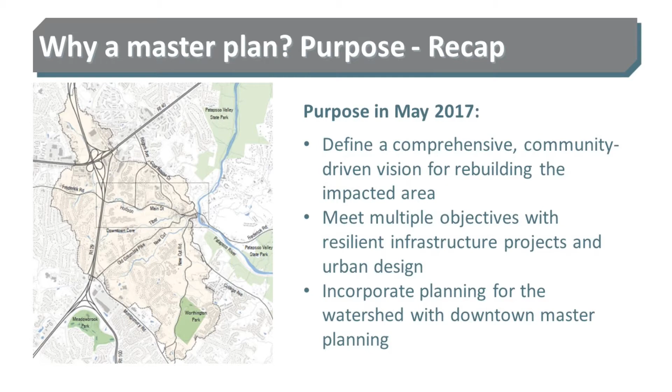In May 2017, the county hired Mahan Rykiel and their team to help us prepare a master plan. We also formed an 11-member Citizens Planning Advisory team that included residents, business and property owners, and community leaders. They've been a great help to the county and a great sounding board as the plan has been developing. They've also done an outstanding job reaching out and promoting this effort with their neighbors, community groups, and social networks.

We look forward to their continued input when we have yet another meeting in October of this year. To date, we've had a total of 9 public master plan meetings.

That includes 5 community meetings and 4 public master plan advisory team meetings. Our consultants also held a pop-up event in 2016 on Main Street as part of the Music Fest, plus dozens and dozens of individual meetings with stakeholders, property owners, and others. Tonight's meeting marks the 10th public master plan meeting, and we'll be back, as I mentioned, in October.

This meeting is the formal restart of the master plan process for Ellicott City, which stalled after the May 27, 2018 flood. This spring, the county had been working with our consultant team on a draft plan, and it was on the verge of being released to the public for comment and input, and then came May 27th.

While the purpose of this master plan remains as relevant as ever, our consultants are in the process of developing and testing new concepts guided by today's realities. Those will be presented and discussed in detail to you in October, which will also include a detailed discussion of the county's 5-year flood mitigation plan.

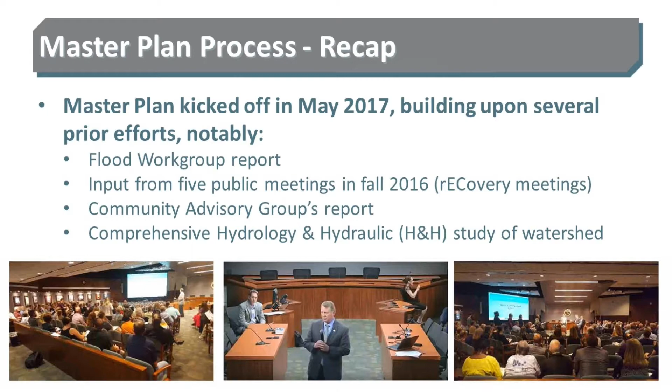We can't stress enough the importance of that H&H study in our work and the model it created out of that study. It's really served as a baseline for our master plan.

For those of you involved in the meetings, you've seen a number of scenarios we presented. We've had a great relationship with McCormick Taylor, working back and forth, testing ideas, and running models to see what works effectively and what doesn't.

It's important to note that out of the H&H study, there were a number of projects identified that Chris will highlight again in his presentation. But we had to use the master plan process to really examine those, to determine which would be most effective in achieving multiple goals for the plan.

Some of the considerations we took into account were constructability, cost, the complexity of not only permitting and constructing, and also the time involved in implementing those.

A number of the recommendations, or potential projects identified in the H&H study, really had a limited ability to achieve multiple objectives. While they achieved some flood mitigation objectives, they wouldn't necessarily accommodate some of the other objectives of the master plan. So that was really the focus of some of our work as we worked with the H&H study and the master plan.

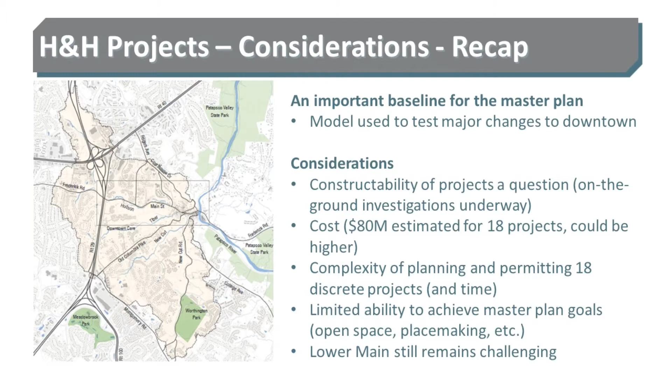So the process, as Val said, I'm not going to go over the detail of the number of meetings we've had. We've had a number of meetings. It was a 4-part process.

We were at the light blue phase, the draft stage. We had shared in March a number of scenarios, and we were in the process of refining those scenarios so we could put them into the draft plan and present them for public review. And that's when the May storm hit.

But in that process, where we left off in March, we had identified a vision and also a number of objectives that are still relevant today. The vision, as a recap, is Ellicott City and its watershed as a model resilient community that thrives by protecting its people, commerce, history, culture, and natural environment. And this is still relevant today.

This vision is informed by 4 master plan objectives that were really developed as the 4 pillars out of the CAG process prior to the beginning of the master plan process. They include rebuilding, environmental, preservation, and economy. So our intent has been to seek flood mitigation strategies that could advance all 4 of these objectives.

The study area, as I indicated earlier, is the entire watershed. As we began looking at background information and studies that had been done, we quickly learned that much of the watershed was built out with limited physical space to make significant changes. Much of the development in the watershed took place before current stormwater management regulations were in place.

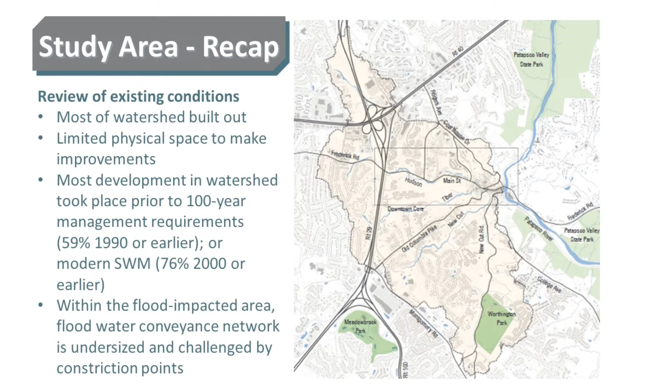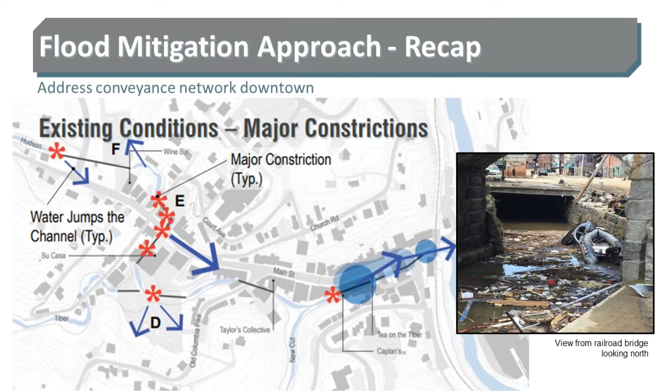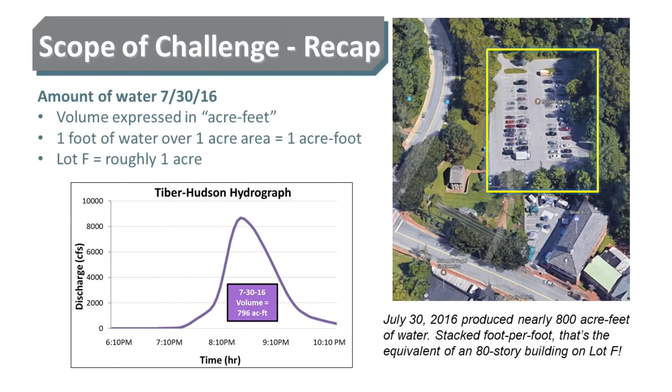In fact, McCormick Taylor helped illustrate this in their H&H study and their presentation to give an idea of the amount of water that needs to be conveyed. Lot F is about a 1 acre footprint, and with 800 acre feet of volume of water during the 2016 event, that would be equivalent of an 80-story building over that 1 acre footprint. So that gives an idea of the volume of water that needs to be conveyed.

For Lower Main and the West End, our biggest challenge, there weren't many opportunities to expand the channel, and our focus there has been on emphasizing flood-proofing.

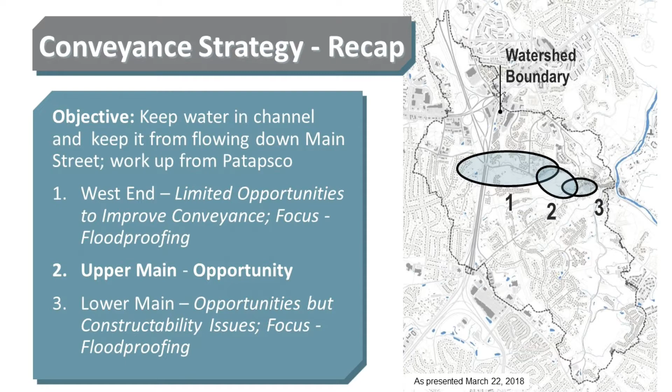As we look at the upper Main conveyance, some of you may remember this diagram from our meetings, the area highlighted in green and the blue dashed line that goes under Ellicott Mills Drive. The concept was to improve conveyance through this area, starting primarily with improved conveyance under Ellicott Mills Drive and then passing from behind the wine bin through Lot E and through Lot D.

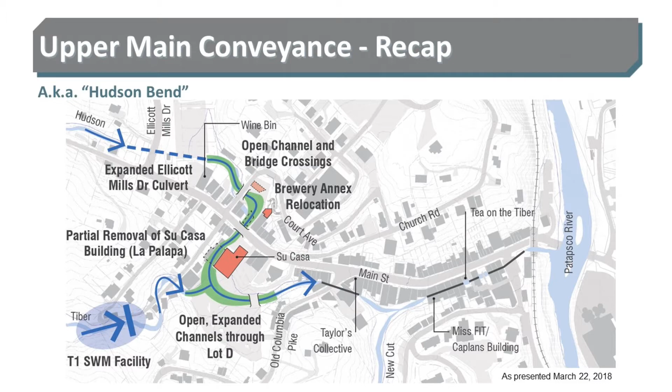And then, go to the next slide. The construction of the Hudson Bend would require acquisition and removal of 2 buildings. This was the La Palapa restaurant that you see dashed in next to the Su Casa building, and then also the brewery annex building.

We examined several model scenarios that did not remove those buildings, but it really was not effective without removing them. We looked at relocating the brewery annex building either elsewhere in Lot D or somewhere else in Ellicott City. It was important to note that before we reviewed these concepts, we met with the property owners of those two buildings to make sure they were comfortable sharing these concepts with the public.

So we shared these concepts in March. One of the keys of removing La Palapa and that business is having a place to relocate it before the removal of that building. That's where we discussed some of the strategies of developing new retail space and a parking structure in Lot D to accommodate that. Visually, we then looked at some illustrative plans.

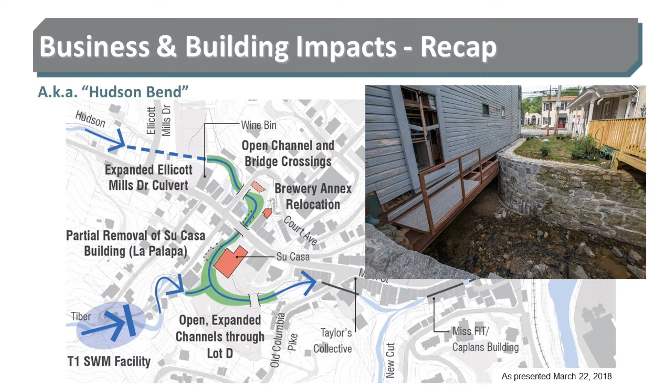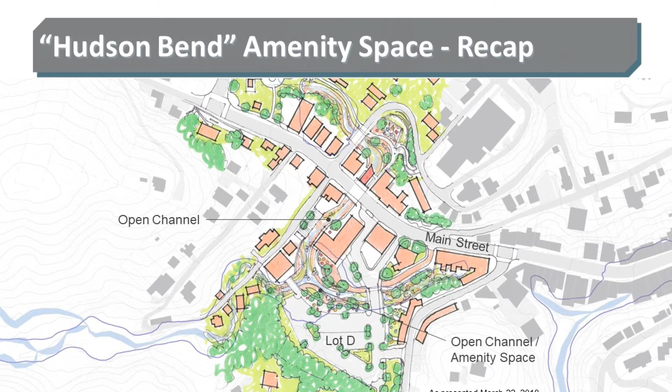It really creates an opportunity not only for flood mitigation, but to create a major amenity that achieves multiple objectives of improved open space, additional pedestrian access through the core of Main Street, and then leveraging additional investment opportunities.

Because of the unique challenges with Ellicott City, this channel could take on several different cross sections, from a 30-foot wide straight wall with a stone face cross section, to what would happen in Lot D, which is an 80-foot width where we would have several terraces and the opportunity to create this as a real amenity space in the community.

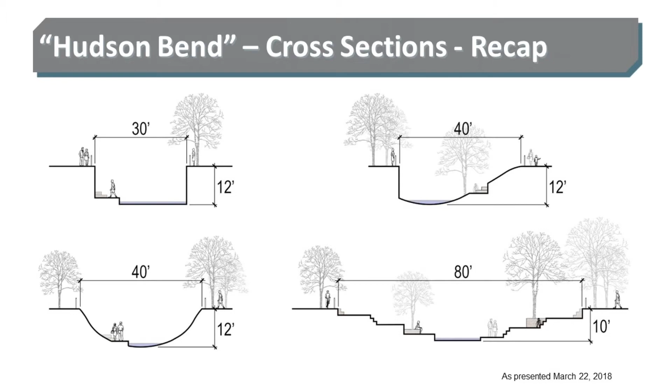We shared several examples and images, and it's important to note that none of these examples is exactly the situation we could have here, but it represents some combination of techniques that could be achieved, from terraces to straight channel walls, and also how to incorporate pedestrian access along the channel, and opportunities for some green where we could, and where that worked with some of the shear stress forces.

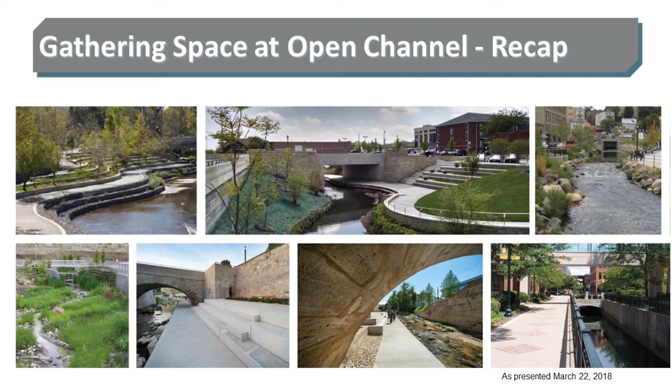It's important to note that prior to the May 27th flood, we had explored options for culverts under Lower Main. Lower Main continued to be a challenge for us.

One of the important things we did with Hudson Bend was make sure in the modeling that if we made improvements to Hudson Bend, it wasn't making matters worse on Lower Main. The modeling indicated a slight improvement. It really didn't make major improvements on Lower Main, but it didn't make it worse, and that allowed us to understand that some of those projects could happen independently.

But we're still concerned with Lower Main. We explored culverts, parallel culverts under Main Street.

It became quickly apparent that the constructability of those is a challenge, with not only the utilities underneath, but the need for the size of those culverts, needing to shore up the buildings, and then shutting down Main Street for possibly several years and disrupting business. And so that's where our focus on Lower Main and West End emphasized flood proofing, recognizing that we were not making significant changes to the flooding for that part.

And that brings us to where we are today. With that recap, I'd like to introduce Ryan Miller with the County's Office of Emergency Management to speak about the May 27th flood.

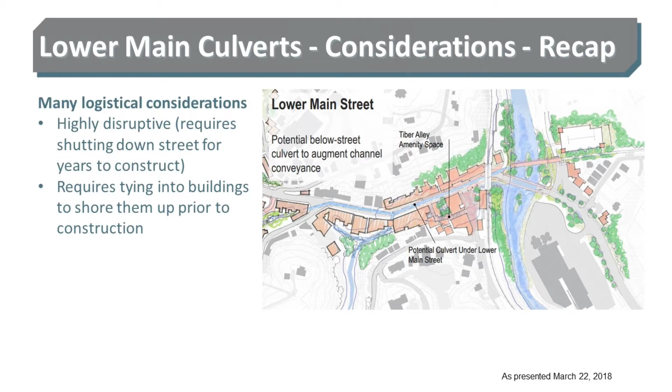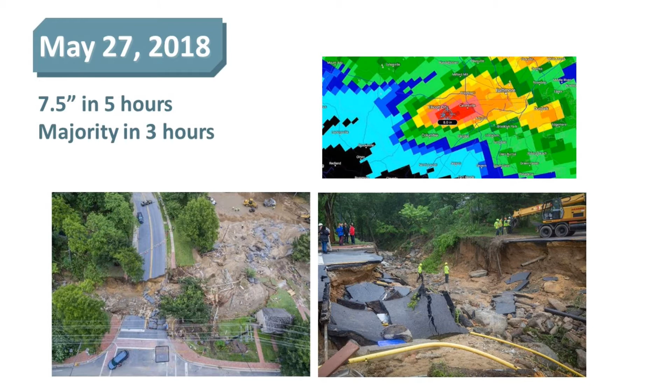Good evening. I'm Ryan Miller, the Emergency Management Director for Howard County. Before going over the 5-year flood mitigation plan, let's take a moment to review the impacts of the May 27th storm. In that storm, we received about 7.5 inches of rain in just 5 hours, the majority of which fell in a 3-hour period. The storm came essentially in 2 waves, which was different than the 2016 storm, which largely came in 1 wave, with each wave being worse than the one before.

In a 6-hour period, starting at 4 p.m., the 911 center received over 1,000 calls for service. Multiple roads were washed away. You can see in the bottom right, that's Ellicott Mills Drive. We lost our old courthouse near Ellicott Mills. It was completely demolished. There was massive damage to streets, sidewalks, and buildings, and there were an untold number of swift water rescues, not just on Main Street, but in the surrounding community as well.

There was actually even a person in that courthouse when it collapsed who was rescued by a fire and rescue command officer who had just arrived on scene to take command of activities on northern Main Street. He'd just come from a fire, actually a 2-alarm fire at Normandy Apartments, and he was pressed into service and rescued that person.

There were numerous stories of heroism where community members rescued their neighbors or rescued strangers. A police officer lost his cruiser and nearly his life on Lower Main Street, assisting with evacuations. You'll see in the video that I'll show next clips from cameras from our very own Ron Peters. Thank you, Ron, for the video footage you've provided to us. At the very end, you'll see firefighters carrying a shop owner to safety. It's an incredible story in and of itself that the clip gives us but only a glimpse.

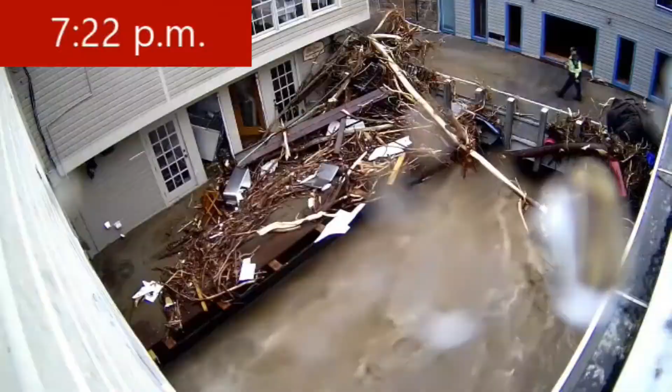Thank you again, Ron, for providing us that video. I'd like to turn it over to Mark DeLuca from Department of Public Works.

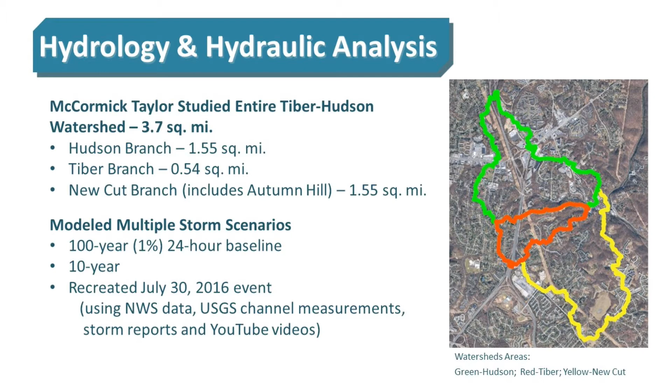As a result of that analysis, 18 projects were identified in their H&H study for an approximate cost of about $80 million.

The interesting thing about the 18 projects is what we were trying to store was 425 acre feet. Some of that above ground in stormwater retention ponds, some below ground, and some of it doesn't store anything but improves the conveyance system through the watershed.

If you remember from one of the slides previously shown, think of Lot F as a 1 acre square, so an acre foot is 1 foot of water on that 1 acre. So this is 425 feet of water, a column of water 425 feet in the air on top of Lot F. It was a tremendous amount of water we were trying to deal with.

As a result of the first phase, we came up with 4 projects, and the recommended phase was about $18.5 million. They were a combination: one retention facility on the Hudson, another retention facility which we call Quaker Mill Retention Facility on Rogers Avenue, a conveyance improvement near the west end at 8600 Main Street, and the Tiber, a very large facility on the Tiber which we're still in the process of studying.

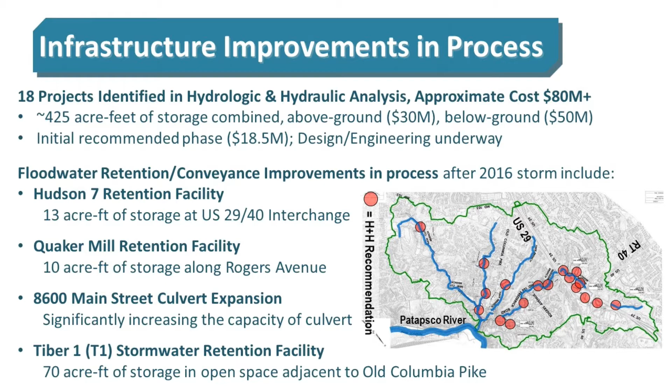So that's where we are today, and what I'd like to do is bring Chris up now to talk a little bit more about the hydraulic modeling.

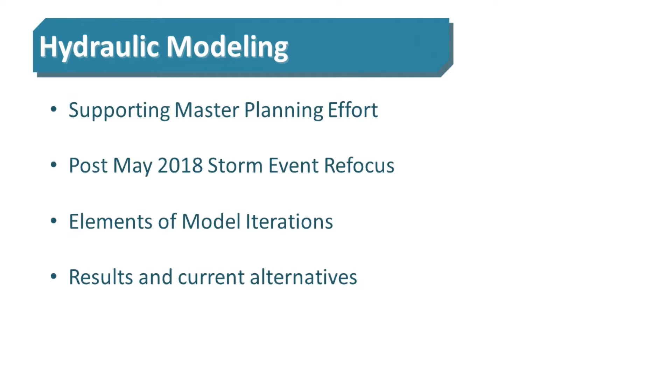So back in May of last year, at the conclusion of the hydraulic presentation... I'm sorry? Yeah? Okay, sure thing.

We noted that the hydraulic model is a living model, one that would be used as a jump-off point for the master planning effort, that we could continue to put ideas and different iterations of these ideas into it to see what the results would be.

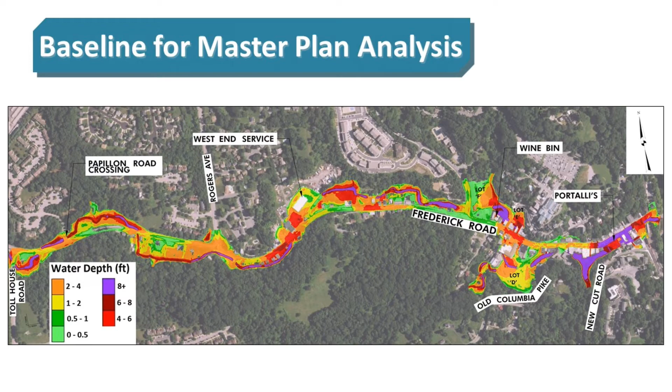So there are a number of variables involved. The first one, of course, is the depth of the flooding, which you can see represented here in our baseline map, which is the map before any of the improvements that Mark had just noted became part of the plan.

Another variable is the velocity, because the depth of water leads to some damage, but it's really the velocity and the force associated with that which leads to the destruction in a lot of what we saw this past May. Notably, once you get down towards the lower main area where you see those yellow and red colors come up, that represents velocities 12 to over 20 feet per second in some places, which is what's carrying the cars and other large pieces of debris and causing the tremendous force that does damage.

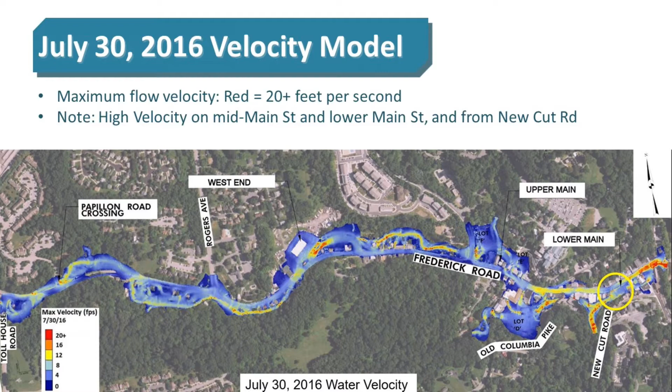A notable area is around Portalli's, where the water in the channel really had nowhere to go once it gets above a certain elevation, and then as it starts carrying a tremendous amount of force, breaking through the buildings at Portalli's and the adjacent buildings. Everyone has seen the videos or experienced it personally, what happened this past May, because once the water reaches a certain point, it's got riverbank on both sides, a building above, it has nowhere else to go, and there's a tremendous amount of force associated with the velocity of that water coming through.

So that's part of the variables that we look at here as part of our hydraulic modeling process.

Back in May 2017, this was the map we showed you, which indicated what the water surfaces would look like with the 18 projects and conveyance projects implemented. This is a notable improvement in a number of areas relative to the baseline shown earlier. But down in Lower Main, we're still experiencing 4 to 6 feet of depth in the worst areas, even with these 18 projects. Some of those projects, as Mark noted, involve underground stormwater management, which are very significant in cost and scope.

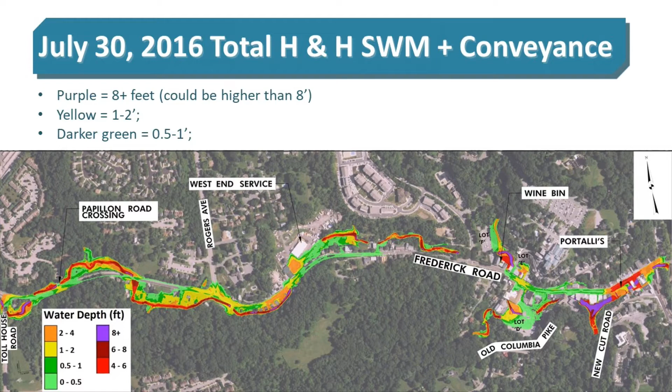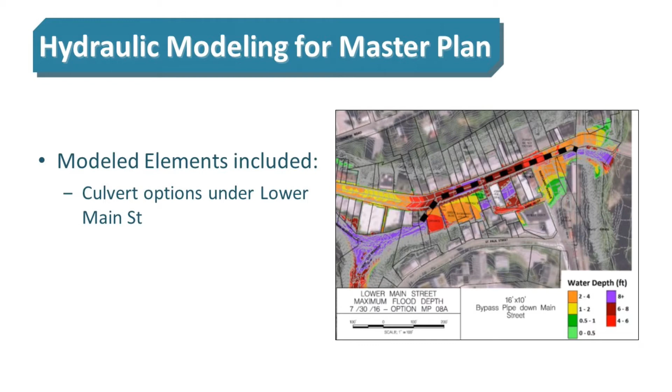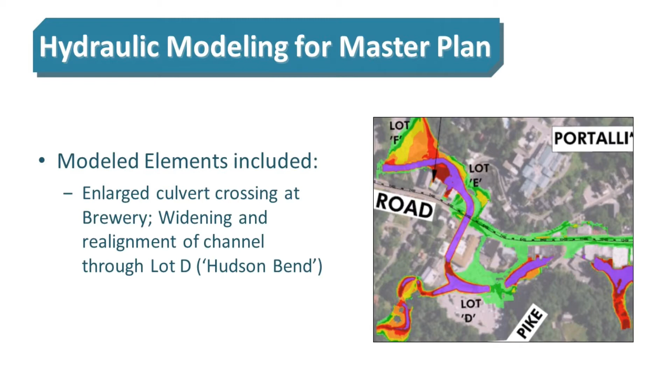Once we started working with the master plan team, we looked at a number of different things. Tom noted the culvert option under Lower Main Street, which comes with considerable constructability and community impact issues. We also looked at the Hudson Bend, which is the expansion of the channel through the Court Avenue to Lot D area. You can see a representation of that here.

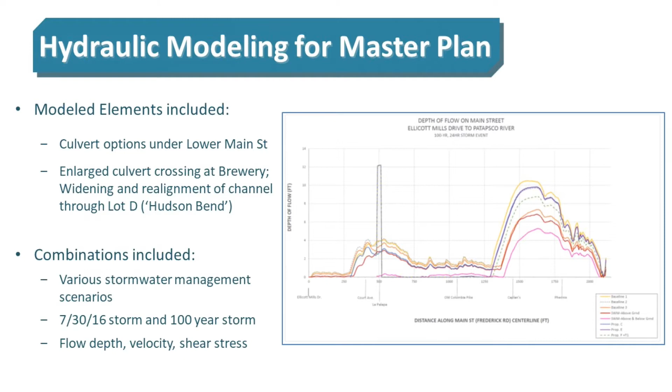After the May 2018 storm, the focus shifted. We started looking at Lower Main in a different way, plugging those options into our model at the direction of county officials to see what they would do to the water surfaces and particularly the velocities in Lower Main Street, because that velocity is really part of what carries the destruction with it. We looked at options including additional channel and floodplain capacity from where the new cut meets the Tiber Hudson down to the Patapsco River, different reconfigurations and removal of certain buildings through that stretch, and Maryland Avenue, which is a pinch point for water under the current arch culvert, to see how we could increase capacity there.

Additionally, we looked at some options in the west end for smoothing out some of the sharp turns in the river and increasing the floodplain, relative to where that could be achieved with certain changes to properties there.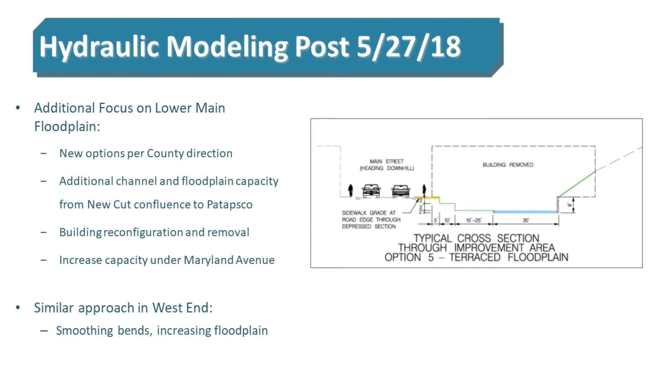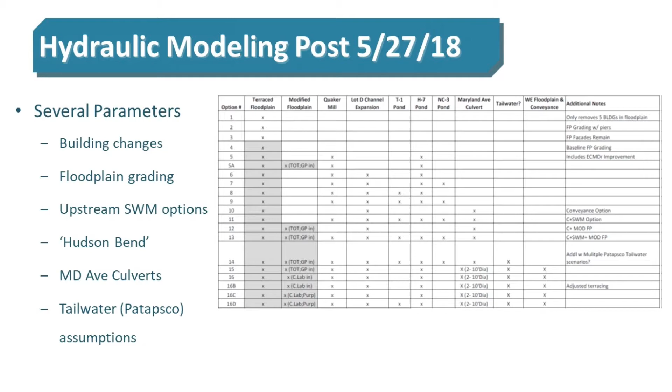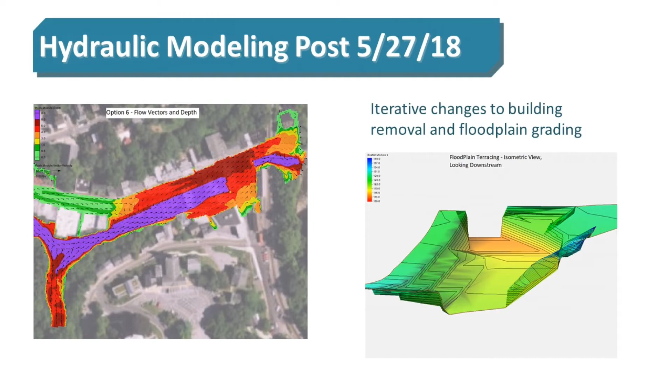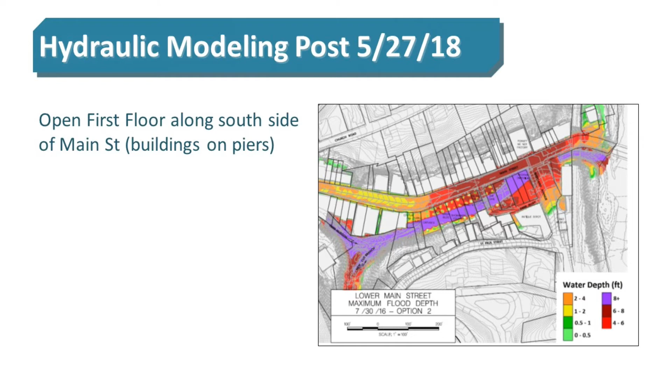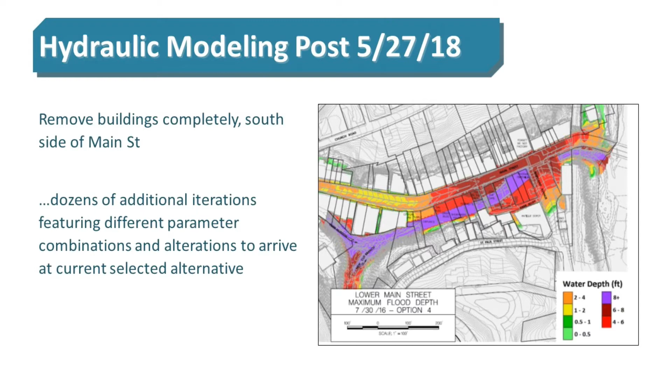This creates additional capacity for the flow through that area. It also includes certain stormwater management improvements, notably the Hudson 7 and Quaker Mill ponds. It includes additional culverts under Maryland Avenue to increase the capacity of that pinch point, as well as the Hudson Bend improvements, which will serve to have less water coming down Main Street into this area and keep more water into the channel.

Additional to this option, in terms of what we modeled, included the new Ellicott Mills culvert and also some changes to the west end grading, though that's not shown here. This modeling effort is very iterative. It's done in conjunction with the rest of the team to try to find the optimum sweet spot of cost, benefit, and impact to the community. We're going to continue working on that.

And I guess with that, I'd like to turn it over to John. Thank you, Chris.

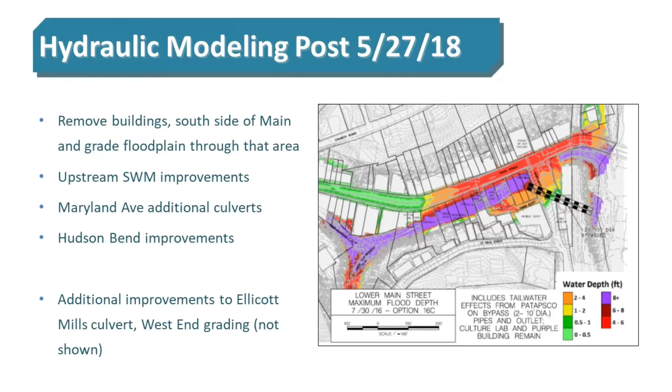As you've heard from Chris, from an engineering standpoint, this has been iterative and looking at a wide variety of scenarios. The key thing here, though, was looking at it from a more comprehensive or strategic view, focusing on these elements you see up on the slide, in terms of the channel or floodplain expansion, which includes acquisition and removal of buildings, with the implementation of a public open space, as well as the stormwater retention elements.

Again, we've mentioned a few of those specific projects, new and expanded culverts. The floodproofing element, the Army Corps came in and took a fairly long amount of time to complete their study, which came out just earlier this year regarding floodproofing.

We have implemented, as part of the current budget year, some floodproofing opportunities and funding for businesses. Quite honestly, we put about $150,000 in there, expecting that there wouldn't be a lot of folks seeking to do it immediately, maybe a few, because the buildings had all been repaired when we came up with the budget. We clearly expect to use all of those funds and continue that program into the future.

As well, community partnerships. Actually, I think I see Lori Lilly here from Howard EcoWorks, as well as the READY program, where we've been working with community organizations that work in this area of flood mitigation in a variety of ways, including the Soak It Up campaign that Lori's organization has put forward, but READY, which is an organization that has brought human resources to this area going back many years, even before the last flood, to maintain the streams, inspect the streams, and provide those reports to the county for action in terms of repairs.

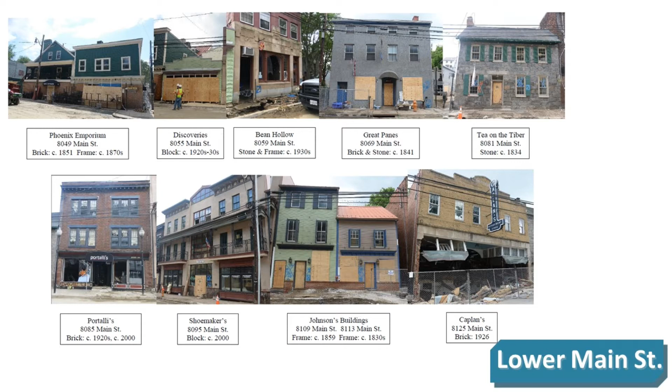Many folks have focused in on this part of the plan, the 10 buildings on Lower Main that are coming down. Chris and Tom mentioned the 2 buildings in what we call Middle Main, which are La Palapa and the brewery annex — the annex to Ellicott Mills Brewery. That was discussed as part of the planning back in 2016. Obviously, this is the newest part of the plan. Most of the other elements of the 5-year plan include things that have been discussed before, not only in the aftermath of the 2016 flood, but also the 2011 flood as well.

So when you look at these buildings, these are the 10 now. There are 5 on top, 5 on the bottom. The 2 that seem to be connected are actually 2 separate buildings owned by one owner, but built at different times. But 4 of these buildings are not able to be repaired — they're beyond reasonable repair at this point, and under the current circumstance would have to come down.

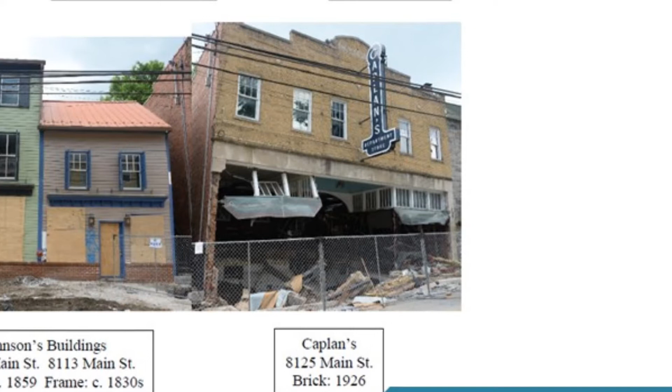That's Caplan's, and you saw a picture earlier in the presentation of Caplan's. That was Caplan's in 2016. If you had a close-up of this, or saw it before it got boarded up, you could look right into the river at Caplan's, and some of that facade had fallen down subsequent to this picture.

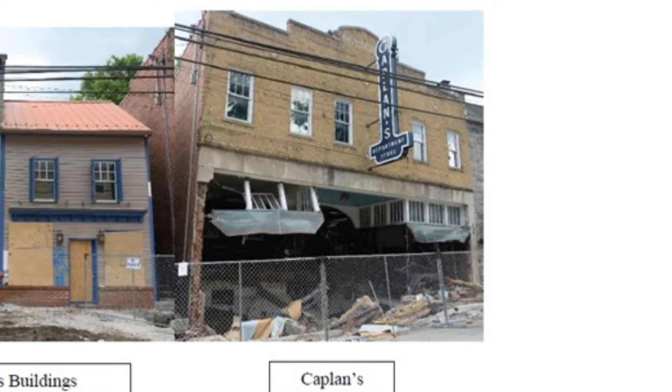That building underwent about $1 million worth of reconstruction after 2016. And the ironic thing is, the building owner said proudly when the building was completed, 'This will be the last building standing after the next flood.' It had steel reinforced walls, thick poured concrete, and new technology. The amount of energy that went into putting that building back together was significant. It was damaged even more than in the last flood.

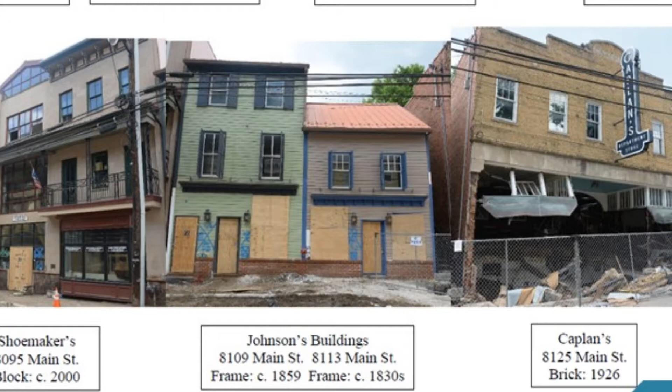The other buildings that are beyond repair, the 2 next to them, sadly, were about to reopen as businesses the weekend after the flood, but again withstood significant damage. The 4th one that is beyond repair is Discoveries. Again, similar to Caplan's, if you look into Discoveries, you're looking right into the river.

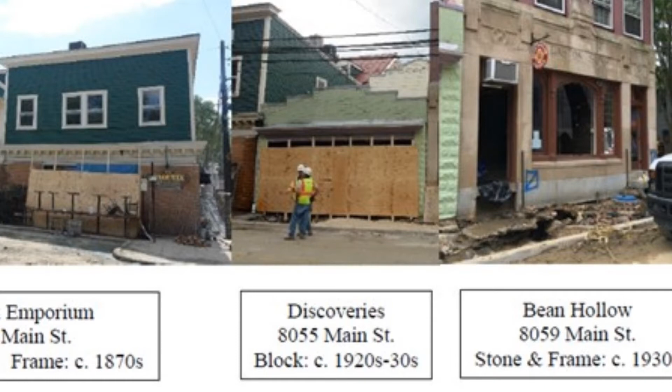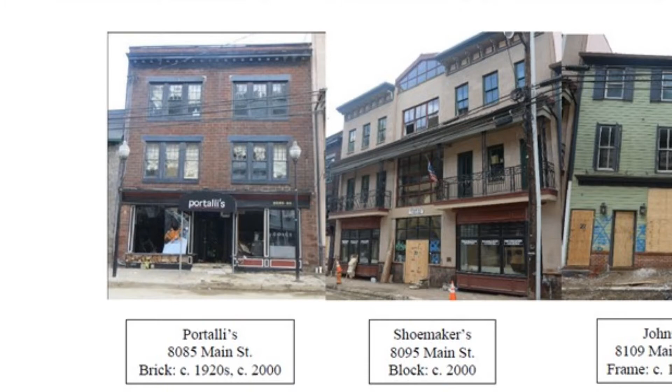The other two buildings, that's 4 so far. The 2 buildings in the bottom left — Portalli's is circa 1920s, but it was basically reconstructed after a fire in 2000. Shoemakers is a brand new building reconstructed after that fire, both under 20 years old, which leaves us with 3 buildings. I don't mean to say anything bad about the other ones, but my favorite one is Bean Hollow, where I've spent a significant amount of time drinking many gallons of coffee over the last 15, 16 years.

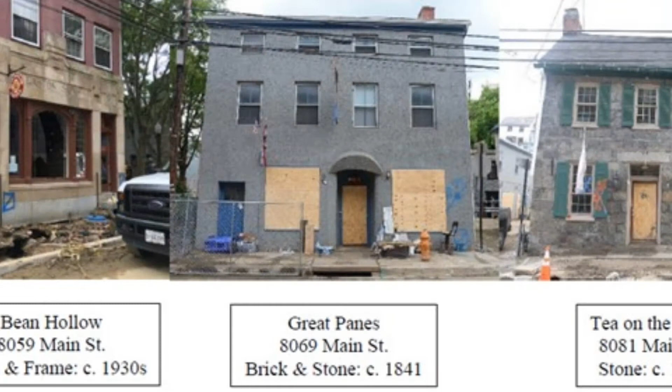Great Panes has been damaged significantly over the years — not demolished, but there was very little left in that building. In fact, I think I saw Len or Sherry here — there they are — and they tell the story after 2016 of saying, 'We're going to restore the building back to its historic appearance.' They took down some of the stucco and realized there was nothing left underneath, because it had been damaged previously and just rebuilt — the shell basically rebuilt.

Phoenix, which is a couple of different constructions over time, as you can see, the brick and then the frame building, were obviously significantly damaged, but fortunately it's reopened.

I was having a hamburger there last night. Burgers, for some reason, tasted a lot better last night than they did recently. Is Mark here? I apologize if you've seen him.

But anyway, I'd recommend you go get a hamburger there while they're open. So that's sort of the inventory of the buildings that are standing. But one of the elements we'll talk about later is how are we going to restore, although they did leave off one building, how are we going to maintain and preserve some of the historic nature? There are a lot of things we're considering.

Tea on the Tiber, as we've been discussing over the last few weeks, is a very strong potential, and now a plan is emerging that'll have that building move. It'll have to be, because of where it's constructed and how it's in the ground there, likely disassembled and reassembled, but that process has been discussed. And honestly, I'm excited about the likelihood that we can preserve that building as you see it in this picture.

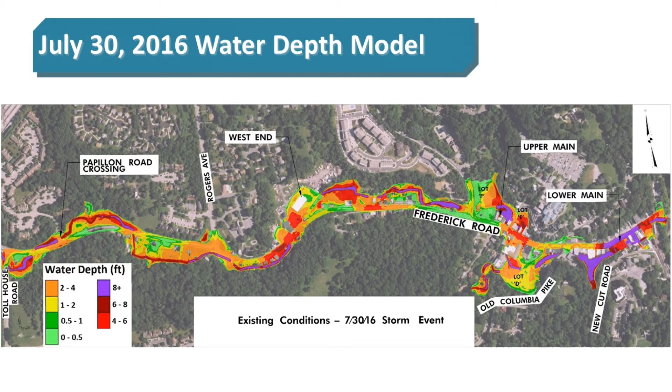Mark, I just want to interrupt for one quick second, because these colors confound me and have for a while. The key thing is the purple—you saw there was plenty of purple on the street in the before picture, and now the purple is in the channel. It's 8+ feet—understand in these storms it was plus, not 8. It was in many cases on the street 12 feet, 15 feet.

We just aren't measuring it beyond that level. You can see, if you've seen videos, and there are plenty around, Ron's got 600-700 hours of video on this, and you see the pictures where it is over the awnings on the first floor. The National Weather Service reported that Catonsville, just a couple miles away, if that storm moved a mile or so west, we would have had water up to the top of the second, bottom of the third floor. Same storm, same time, slightly to the east, those depths would still be purple.

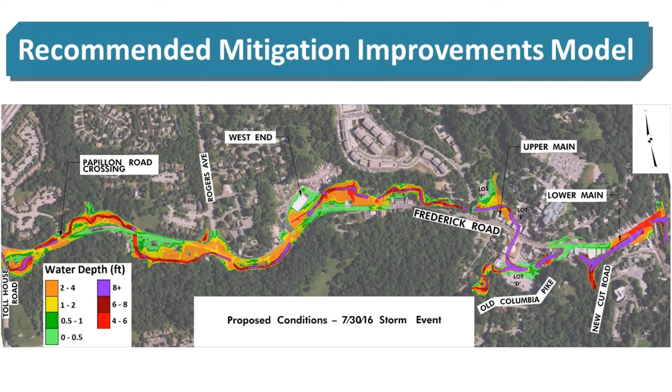So life safety is obviously the key driver in all this. There were people at risk on both sides of the street: the people in the buildings that were significantly damaged on the south side that we're discussing removing, but on the north side, similar situations because of the flow and velocity of water.

There'll be another session next month with greater participation in activities around design and input. I mentioned the Historic Structures Review Committee. This is by executive order, creating the group of local folks involved in historic preservation in the community. The Historic Preservation Commission had a preliminary meeting where the county provided the plan for their information. As we go through the process, there's an application process the county must follow that Historic Preservation will monitor and manage, including public input. Then there's state and federal permitting processes, also public parts of the process, and then the public hearing on the legislation about funding the plan, which is next Monday. Prepare to stay late, we'll be here for a bit. Those are just a snapshot. The only thing I'd leave with before handing it back to Tom is time.

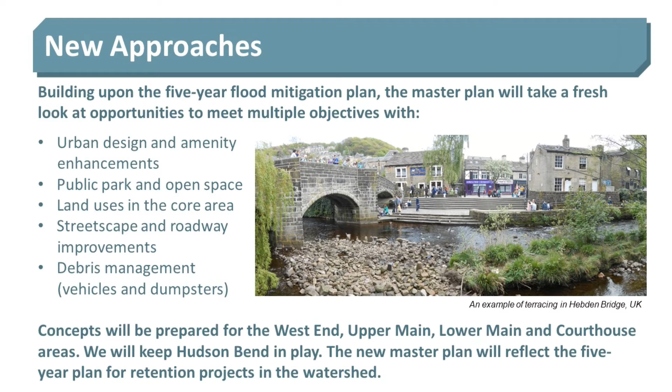The schedule: we have a master plan advisory team meeting in mid-October. The next public workshop is in late October, and then there'll be online engagement opportunities after that, leading to preparing the draft plan for public review in early 2019. We'll get that to the county right before the holidays, give them a chance to review, and then open it up to the public in early 2019.

Before we move on to the Q&A, I wanted to recognize a couple other folks who have been part of the process. Senator Gail Bates, I heard she walked into the room - there she is in the back. And Delegate Ebersole. Senator Bates represents this district and has worked closely with Bob and me in the county on state support, as well as Delegate Ebersole, who, I'll be honest, doesn't represent this area, but has been an active part of the conversations in the last session as co-chair of our delegation. So appreciate you being here as well.